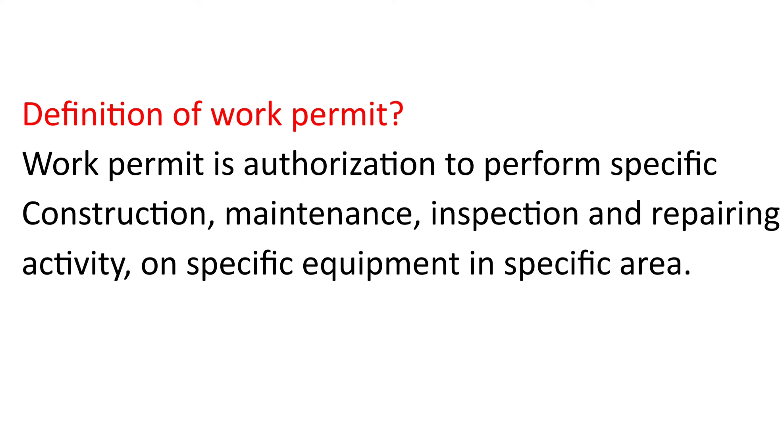Saudi Aramco safety supervisor question and answer. Question: definition of work permit. Answer: a work permit is authorization to perform specific construction, maintenance, inspection, and repairing activity on specific equipment in a specific area.

Question: define safety. Answer: freedom from risk or harm, loss, or injury. Question: what is a potential hazard? Answer: anything that can cause harm to people, the environment, assets, and business.

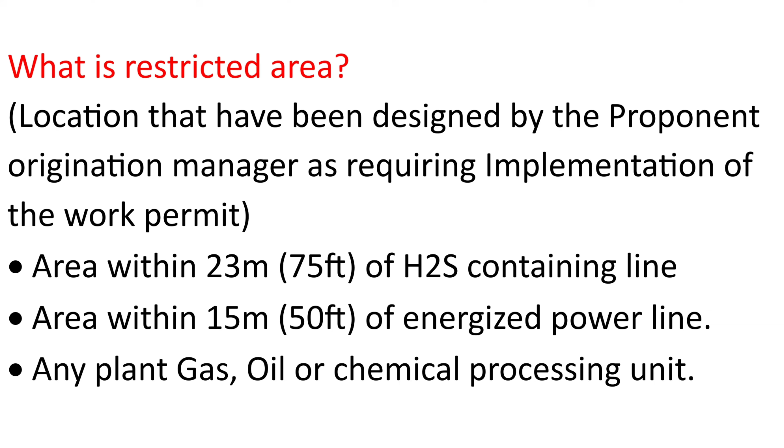Question: what is a restricted area? Answer: locations that have been designated by the proponent organization manager as requiring implementation of the work permit; areas within 23 meters (75 feet) of an H2S-containing line; areas within 15 meters (50 feet) of an energized power line; any plant gas, oil or chemical processing unit.

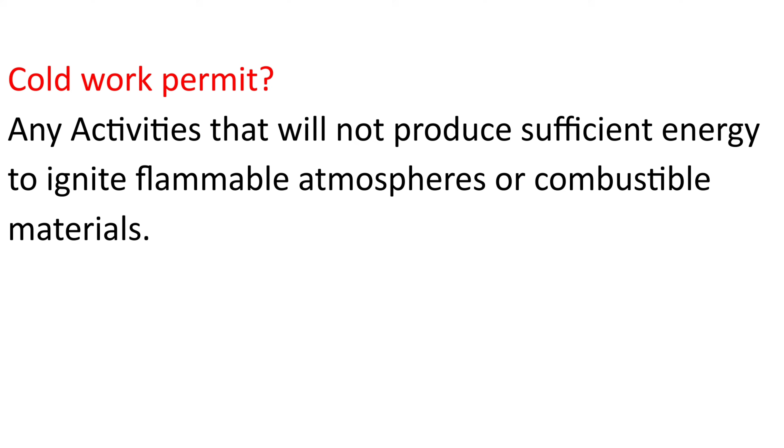Question: cold work permit. Answer: any activities that will not produce sufficient energy to ignite flammable atmospheres or combustible materials. Question: define hot work. Answer: any activity that may develop enough spark, flame, or heat to ignite a flammable atmosphere or combustible material.

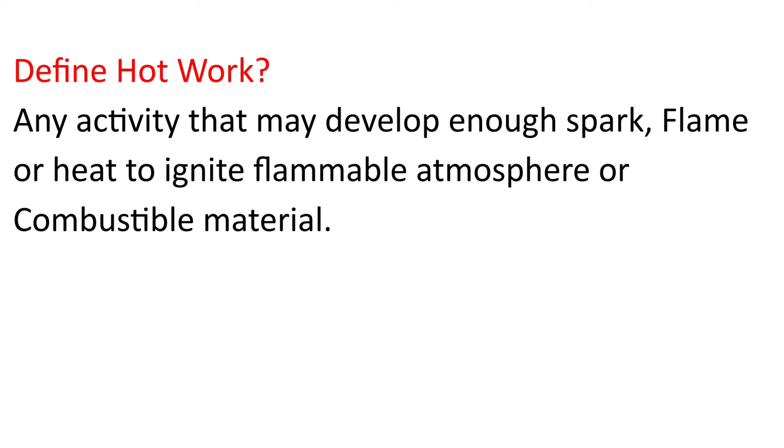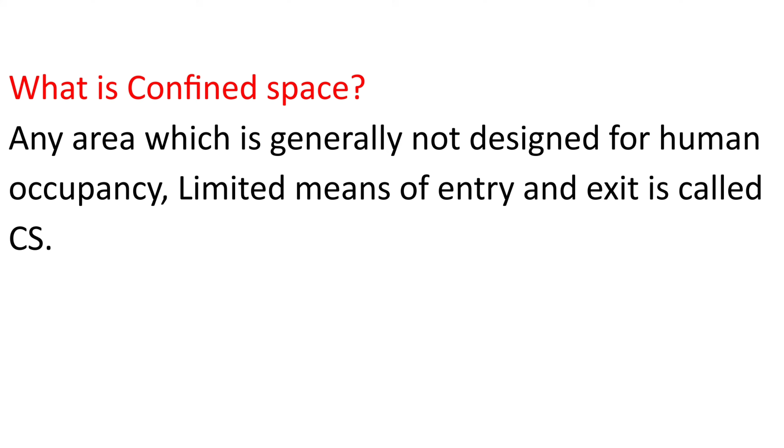Question: what is a confined space? Answer: any area which is generally not designed for human occupancy, with limited means of entry and exit, is called a confined space. Question: examples of confined space. Answer: vessels, valve boxes, manholes, boilers, tanks, and excavations more than 1.2 meters, etc.

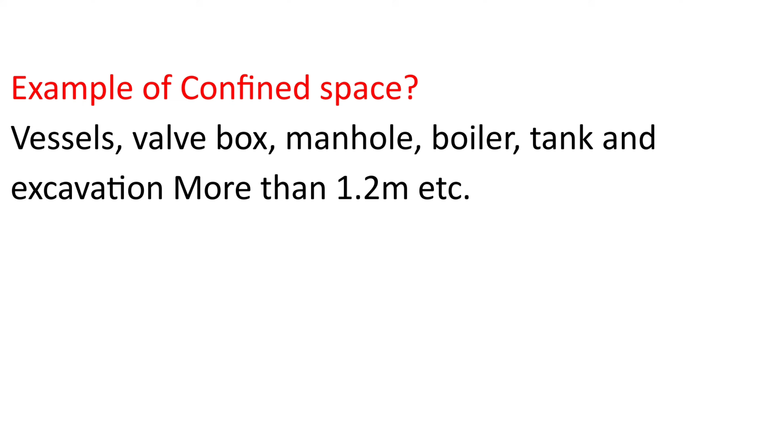Question: what is EO/LB? Equipment opening, line break. Answer: any activity associated with the initial opening of equipment that is part of a closed system that may contain hazardous material. This permit may be used for oil and gas pipelines, H2S pipelines, nitrogen pipelines, and hazardous material lines like sulfuric acid.

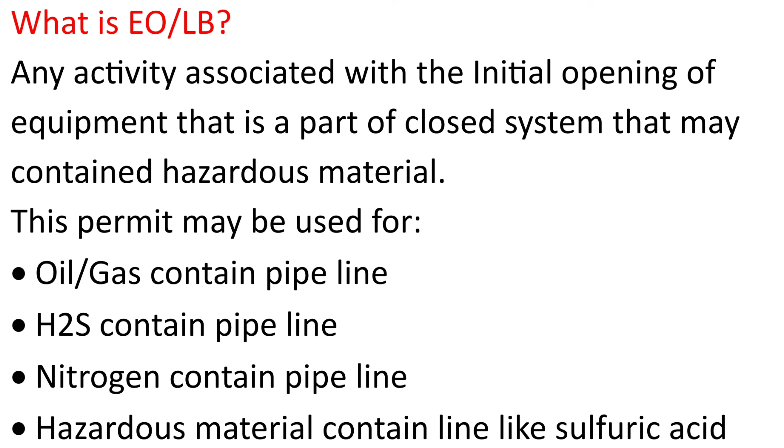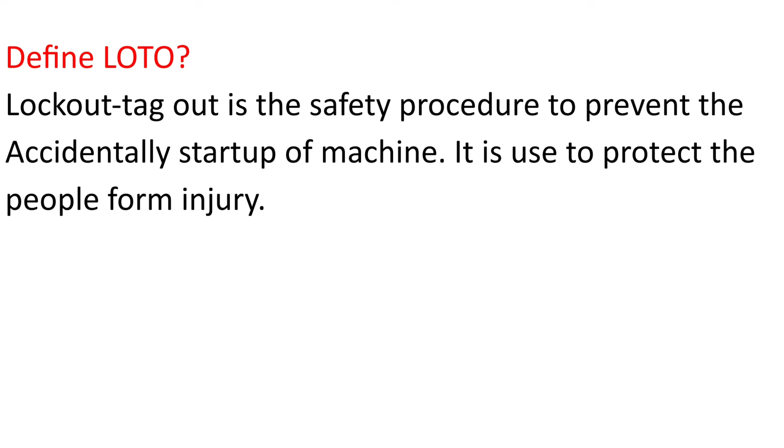Question: define LOTO. Answer: lockout and tagout is the safety procedure to prevent the accidental start-up of a machine. It is used to protect people from injury. Question: where is LOTO installed? Answer: on electrical equipment, LOTO is installed on the junction box and breaker or switch. On mechanical equipment, LOTO is installed on the valve.

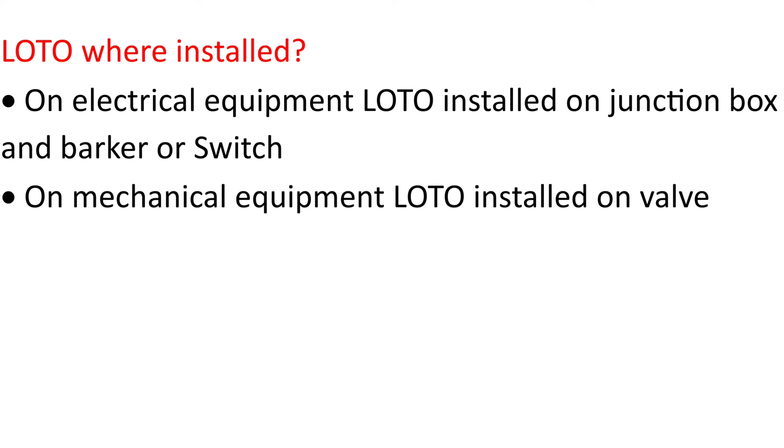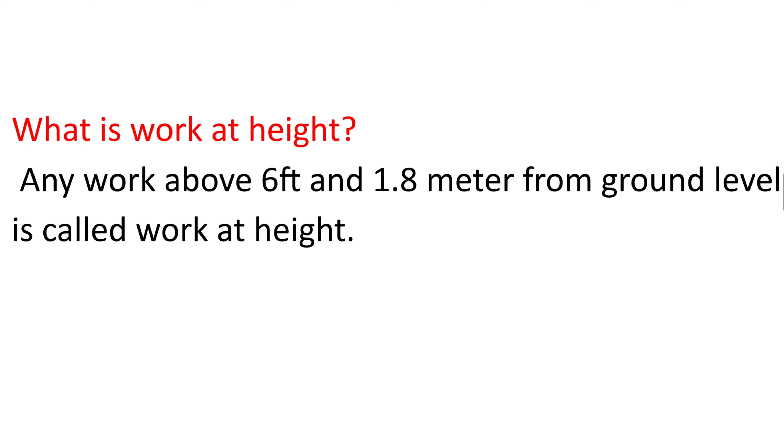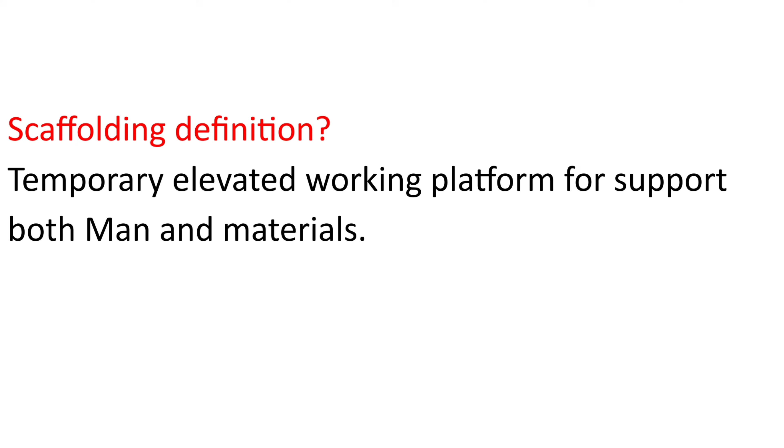Question: what is work at height? Answer: any work above 6 feet or 1.8 meters from ground level is called work at height. Question: scaffolding definition. Answer: a temporary elevated working platform to support both men and materials.

Question: scaffolding tag signature and validity. Answer: above 1.8 meters to 6 meters, the tag is signed by an Aramco approved scaffolding supervisor. Above 6 meters, the tag is signed by an Aramco approved inspector, and both are valid for 2 weeks or 14 days. Above 12 meters and heavy loads need a scaffolding plan prepared by a certified scaffolding engineer.

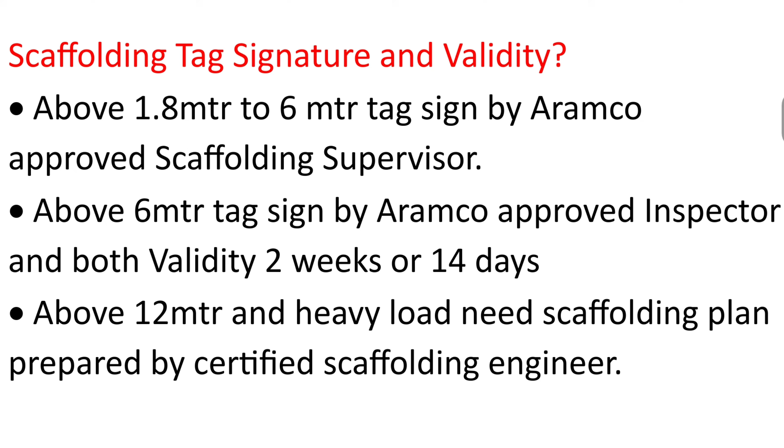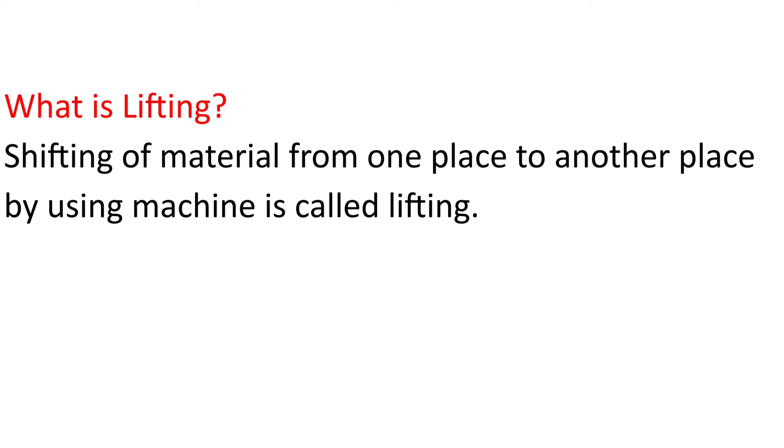Question: what is lifting? Answer: shifting material from one place to another by using a machine is called lifting. Question: types of cranes. Answer: mobile crane, hydraulic crane, overhead crane, gantry crane, tower crane.

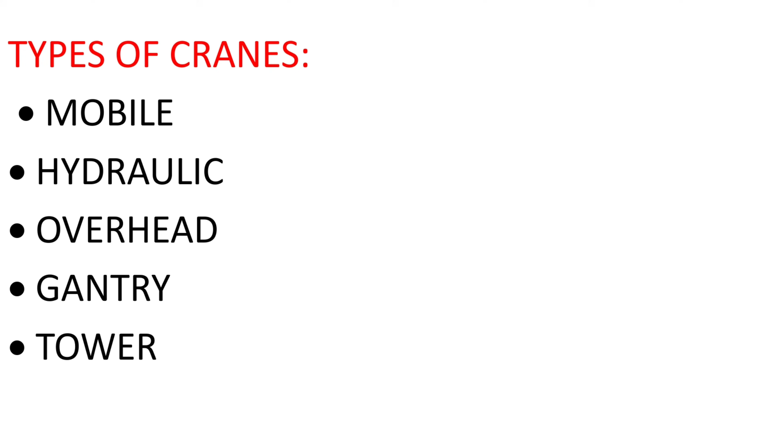Question: rigger level 1 capacity. Answer: lifting over 40 tons. Question: rigger level 2 capacity. Answer: lifting up to 40 tons. Question: rigger level 3 capacity. Answer: lifting up to 10 tons.

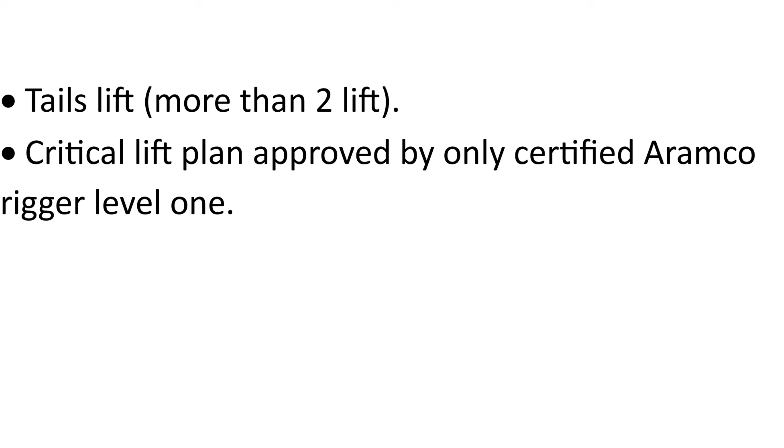Question: what is critical lifting? Answer: lifting over 40 tons, lifting near overhead power lines, lifting near populated areas, lifting near railway lines, lifting at night time, lifting in a plant, lifting more than 85% of rated crane capacity, tandem lifting with 2 or more cranes. The critical lift plan is approved only by a certified Aramco rigger level 1.

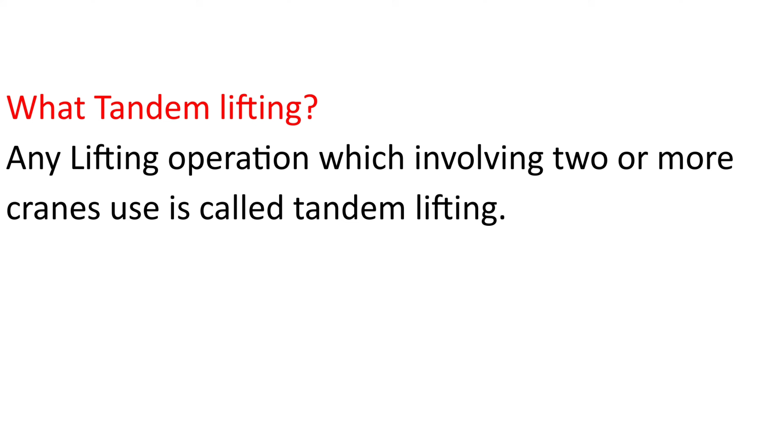Question: what is tandem lifting? Answer: any lifting operation which involves 2 or more cranes is called tandem lifting. Question: what do TWA and SWL stand for? Answer: TWA stands for time weighted average. SWL stands for safe working load.

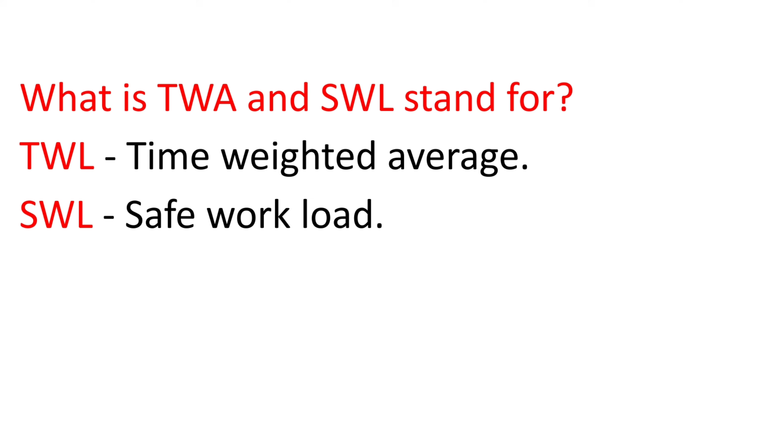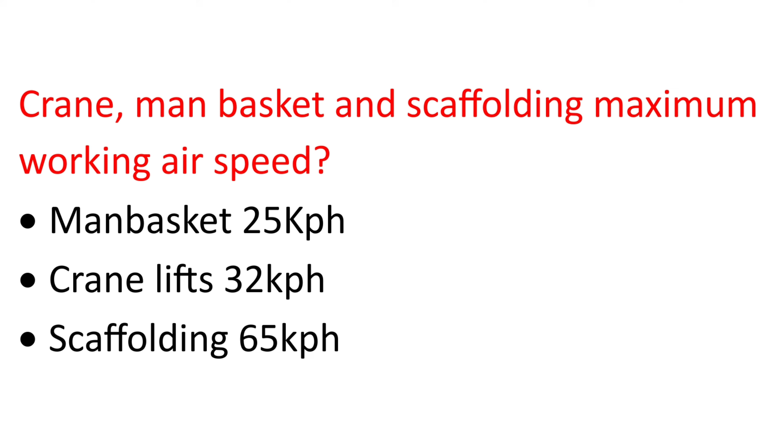Question: crane, man basket and scaffolding maximum working wind speed. Answer: man basket 25 km per hour, crane lifting 32 km per hour, scaffolding 65 km per hour.

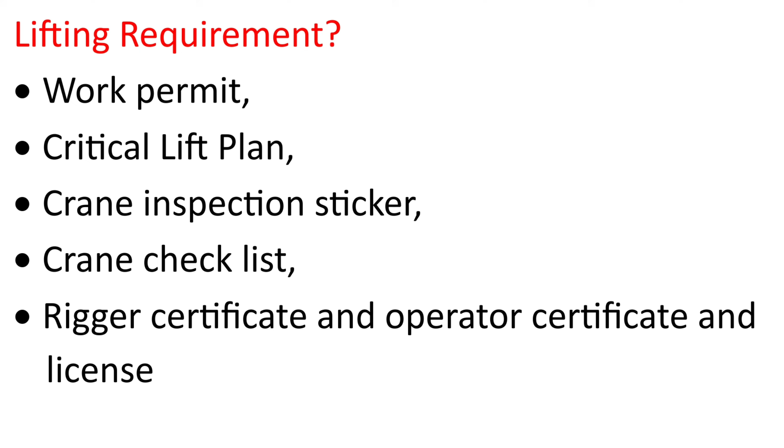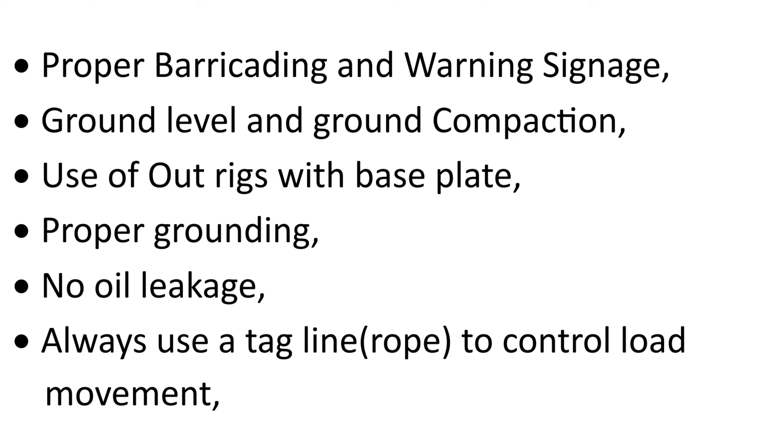Question: lifting requirements? Answer: work permit, critical lift plan, crane inspection sticker, crane checklist, rigger certificate, operator certificate and license, proper barricading and warning signage, ground level and ground compaction, use of outriggers with base plates, proper grounding, no oil leakage, always use a tag line rope to control load movement, safe distance from power lines, boom safe angle 45.

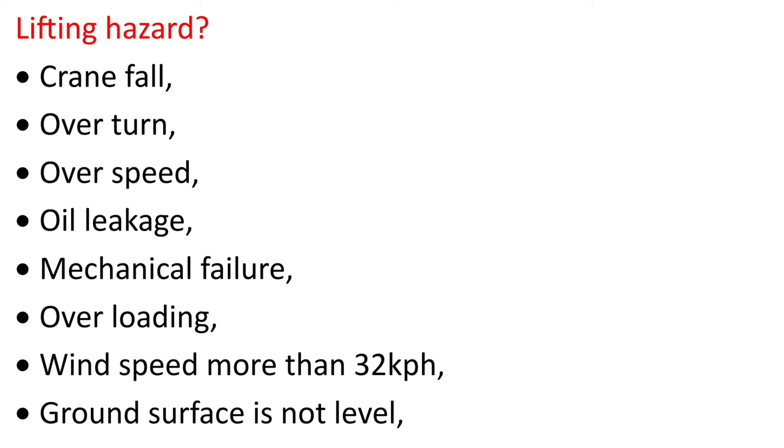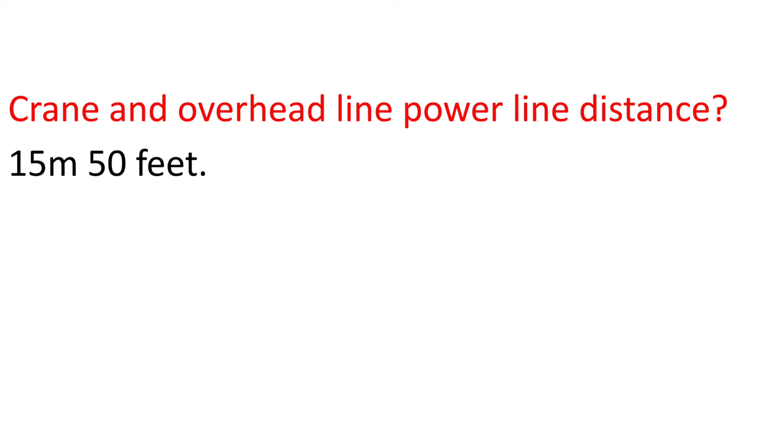Question: lifting hazards. Answer: crane fall, overturn, overspeed, oil leakage, mechanical failure, overloading, wind speed more than 32 km per hour, ground surface not level. Question: crane and overhead power line distance. Answer: 15 meters, 50 feet.

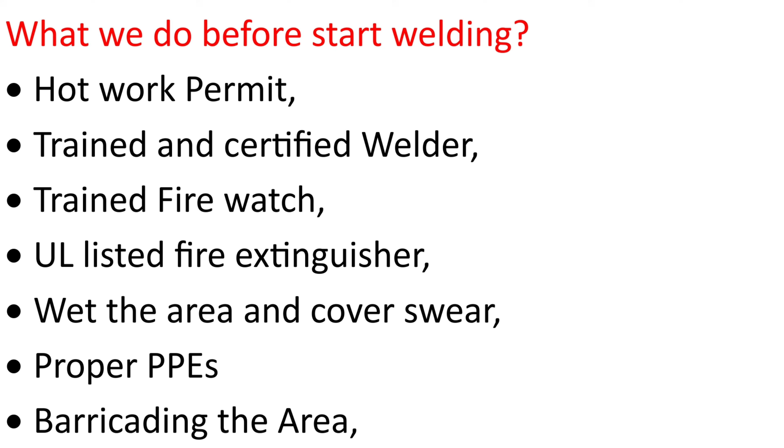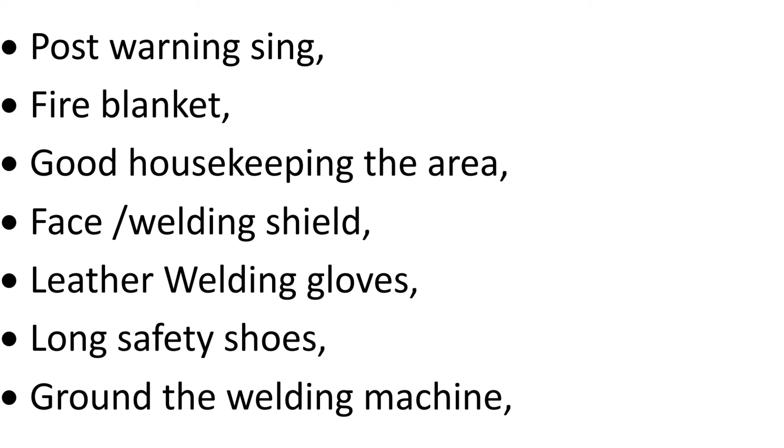Question: what do we do before starting welding? Answer: hot work permit, trained and certified welder, trained fire watch, UL listed fire extinguisher, wet the area and cover sewers, proper PPE, barricade the area, post warning signs, fire blanket, good housekeeping of the area, face welding shield, leather welding gloves, long safety shoes, ground the welding machine.

Question: what does PASS stand for? Answer: P for pull the pin, A for aim at the base of the fire, S for squeeze the lever, S for sweep from side to side.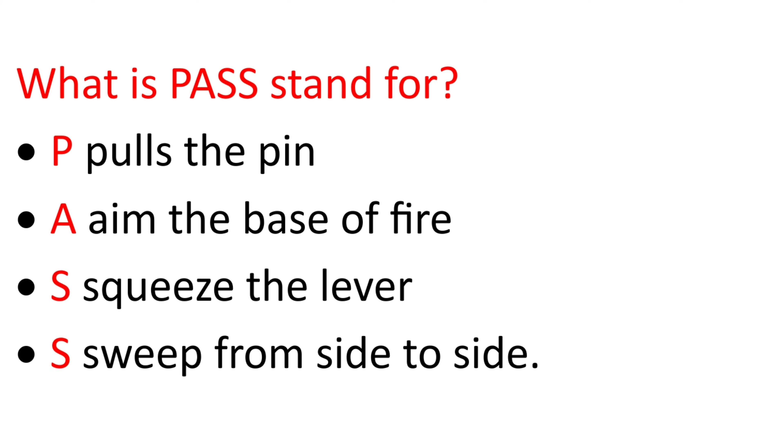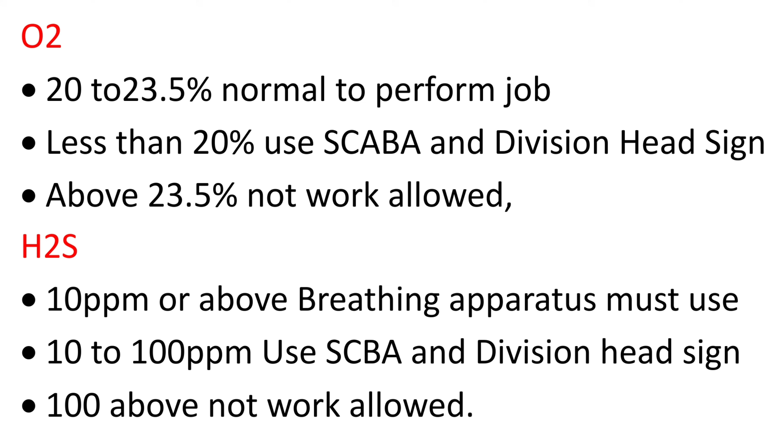Question: gas levels. Answer: oxygen, 20% to 23.5% is normal to perform the job. Less than 20%, use SCBA and division head sign. Above 23.5%, no work allowed. H2S: 10 ppm or above, breathing apparatus must be used; 10 to 100 ppm, use SCBA and division head sign; 100 and above, no work allowed.

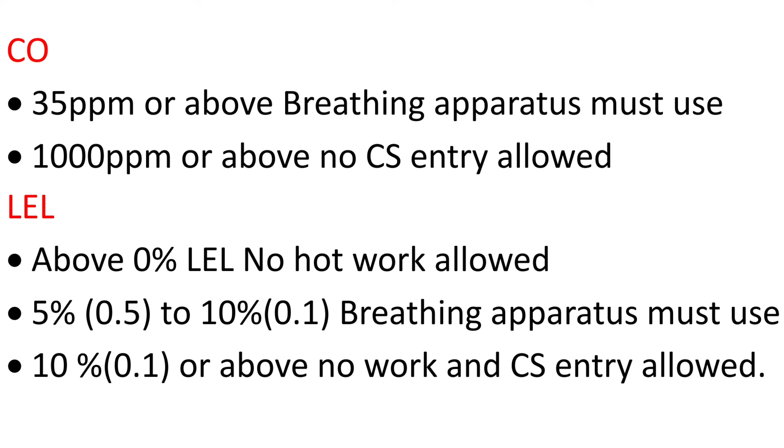CO: 35 ppm or above, breathing apparatus must be used; 1000 ppm or above, no confined space entry allowed. LEL: above 0% LEL, no hot work allowed. 5% (0.5) to 10% (0.1), breathing apparatus must be used. 10% (0.1) or above, no work and no confined space entry allowed.

Question: what is the IDLH limit of H2S? Answer: immediately dangerous to life and health, 100 ppm and above. Question: what is fire? Answer: the chemical chain reaction of fuel, heat, and oxygen is called fire.

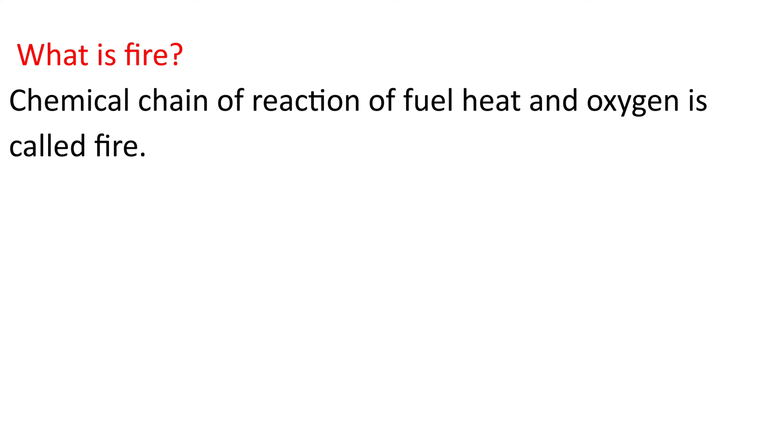Question: class of soil and angle used in excavation. Answer: rock, slope angle 90 degrees. Class A, tight cohesive soils such as clay, slope angle 75 degrees. Class B, less cohesive soils such as mixed soil, rock and clay, slope angle 45 degrees. Class C, least cohesive soils such as gravel, sand, freely slipping soil, safe slope angle 34 degrees.

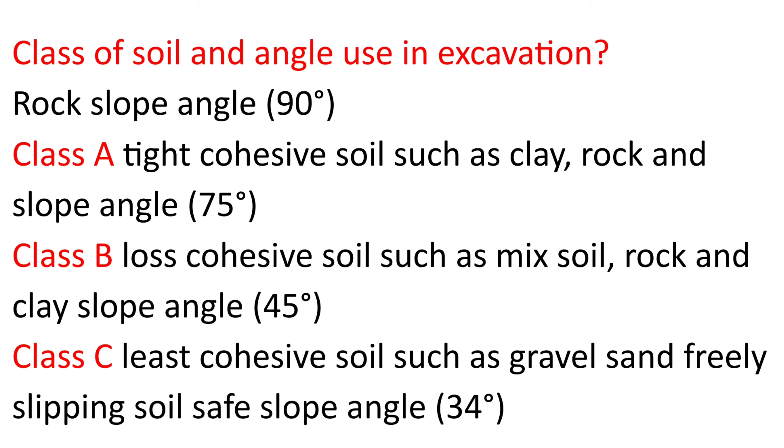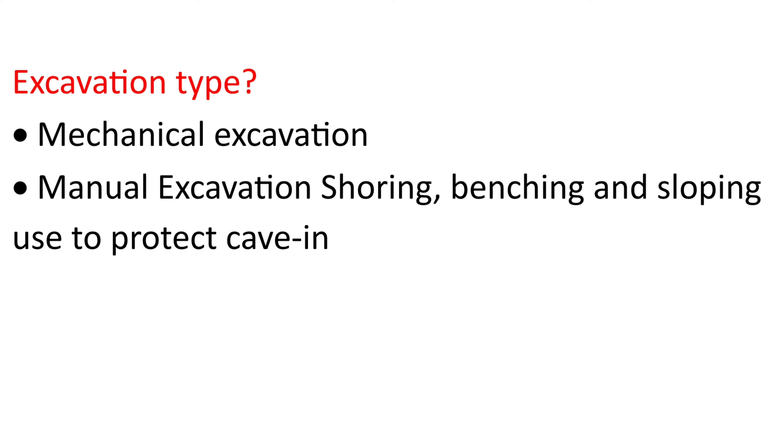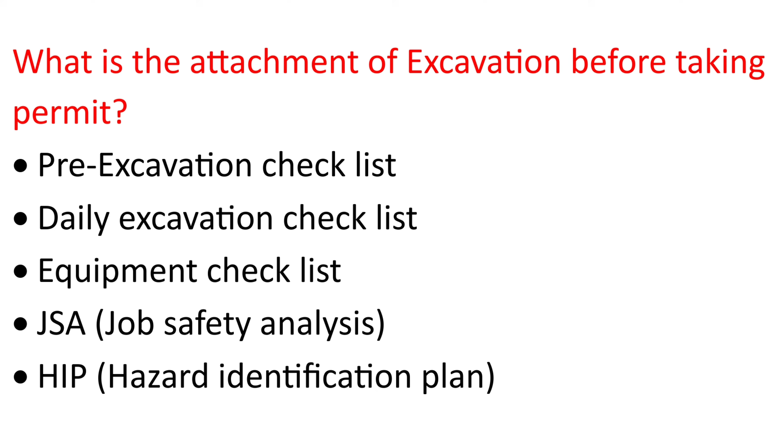Question: excavation type. Answer: mechanical excavation and manual excavation. Shoring, benching, and sloping are used to protect against cave-in. Question: what are the attachments of excavation before taking a permit? Answer: pre-excavation checklist, daily excavation checklist, equipment checklist, JSA (job safety analysis), HIP (hazard identification plan), MS (method statement), confined space entry plan, excavation plan.

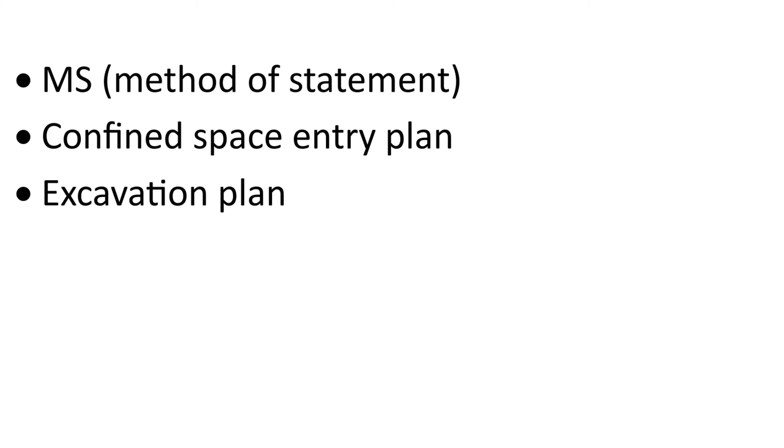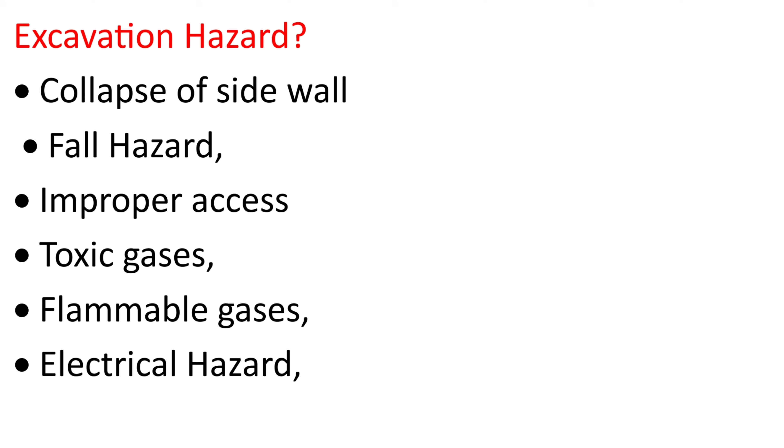Question: excavation hazards. Answer: collapse of sidewall, fall hazard, improper access, toxic gases, flammable gases, electrical hazard, fire hazard, slip, trip and fall, poor housekeeping, proper sloping and shoring method not used, biological hazards such as snakes, bacteria, scorpions.

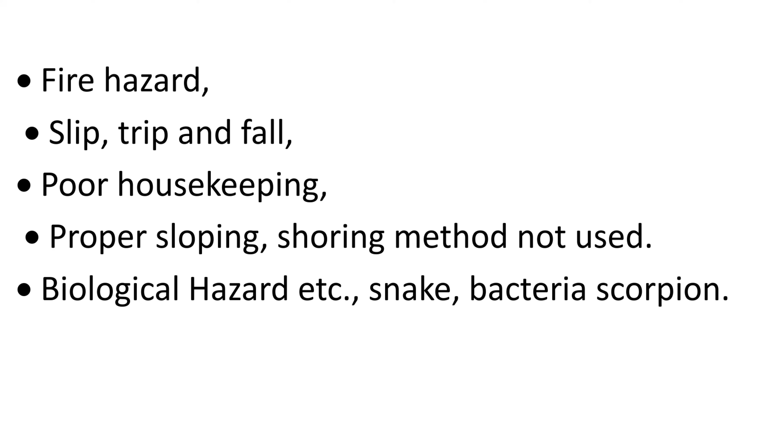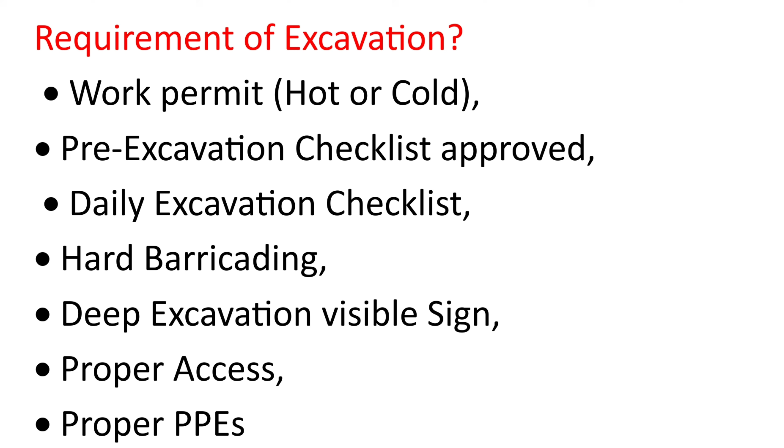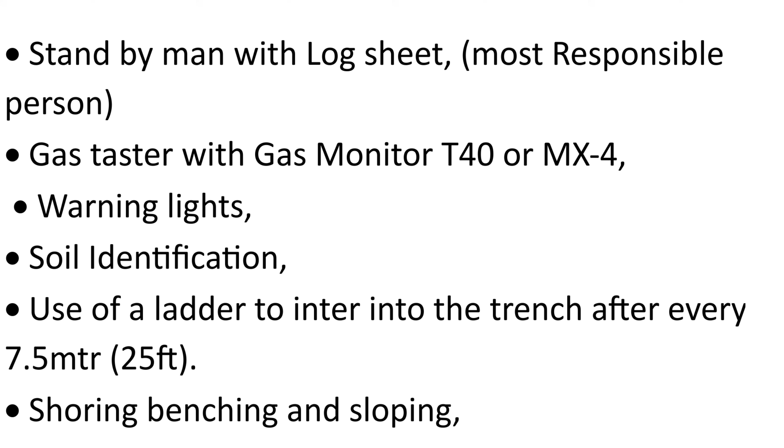Question: requirements of excavation. Answer: work permit, hot or cold, pre-excavation checklist approved, daily excavation checklist, hard barricading, deep excavation visible sign, proper access, proper PPEs, standby man with log sheet, most responsible person, gas tester with gas monitor, warning lights, soil identification, use of a ladder to enter the trench after every 7.5 meters (25 feet), shoring, benching and sloping, dewatering.

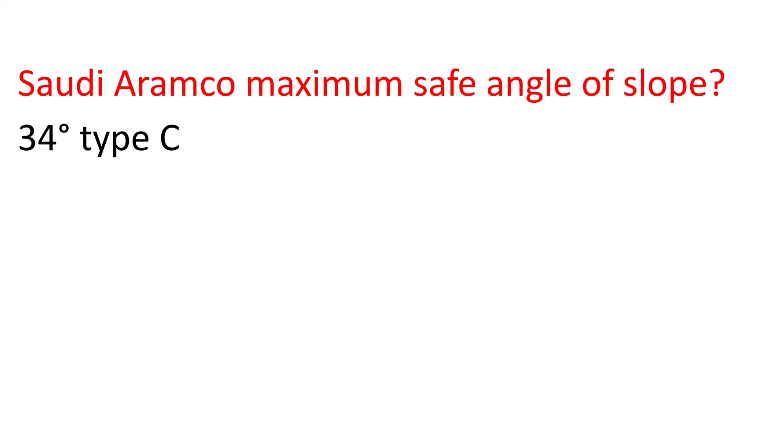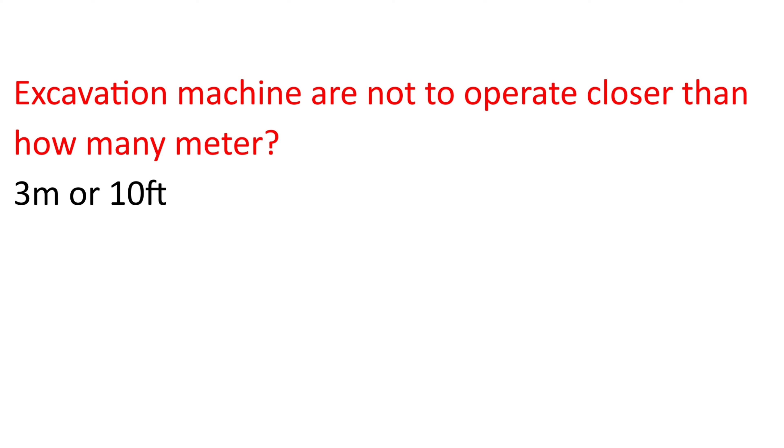Question: Saudi Aramco maximum safe angle of slope. Answer: 34 degrees, type C. Question: excavation machines are not to operate closer than how many meters? Answer: 3 meters, or 10 feet. Question: in benching, the horizontal step and vertical rise between each step should be approximately how many meters? Answer: 1.2 meters, 4 feet.

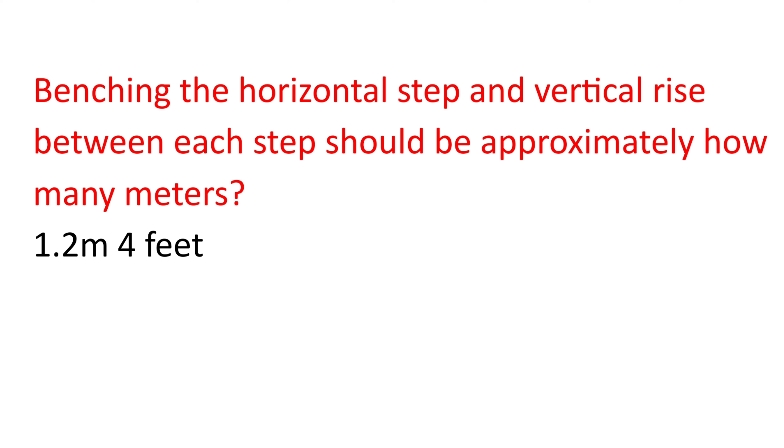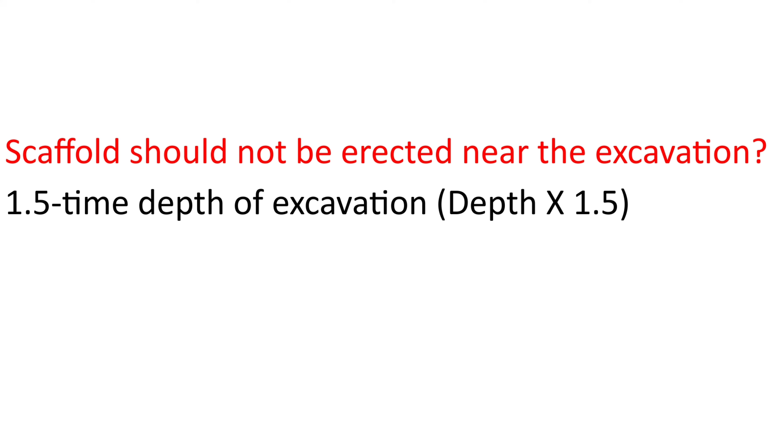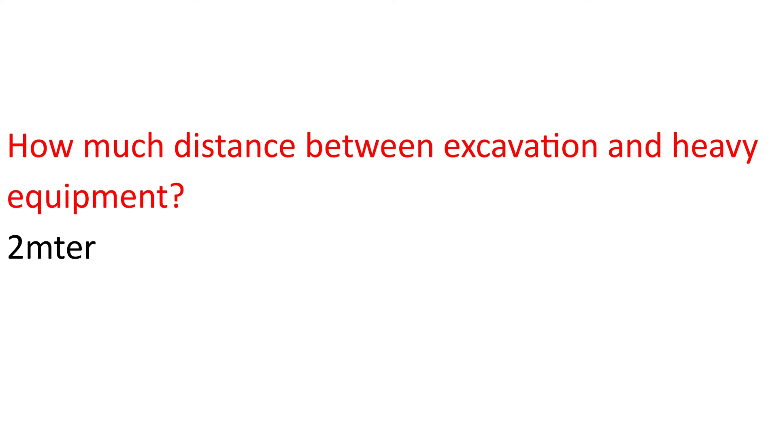Question: motor vehicles, cranes and heavy equipment shall be kept how far from the edge of excavation? Answer: 2 meters, 6.5 feet. Question: spoil piles should be placed at least how many feet from the edge of excavation? Answer: 2 feet away. Question: scaffold should not be erected near the excavation within what distance? Answer: 1.5 times the depth of excavation. Question: how much distance between excavation and heavy equipment? Answer: 2 meters.

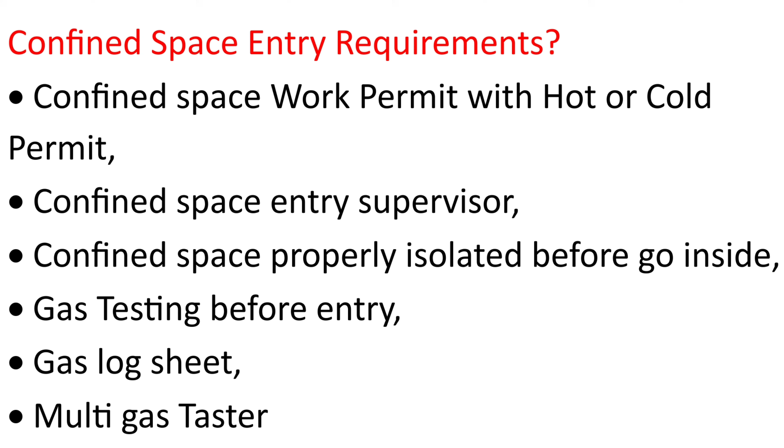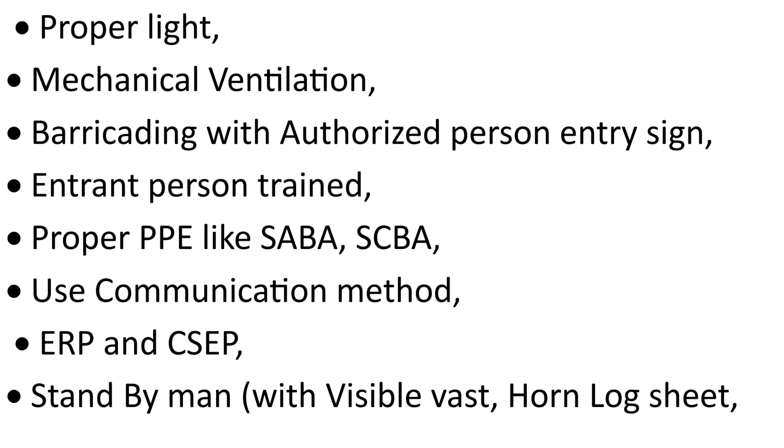Question: confined space entry requirements. Answer: confined space work permit with hot or cold permit, confined space entry supervisor, confined space properly isolated, gas testing before entry, gas log sheet, multi-gas tester, proper light, mechanical ventilation, barricading with authorized person entry sign, entrant trained, proper PPE like SABA and SCBA, communication method, ERP, and confined space standby man with visible vest, horn, log sheet, and gas meter.

Question: confined space communication methods. Answer: face-to-face, hand signal, verbal communication, radio communication, OATH method. In this method, use a rope and lifeline.

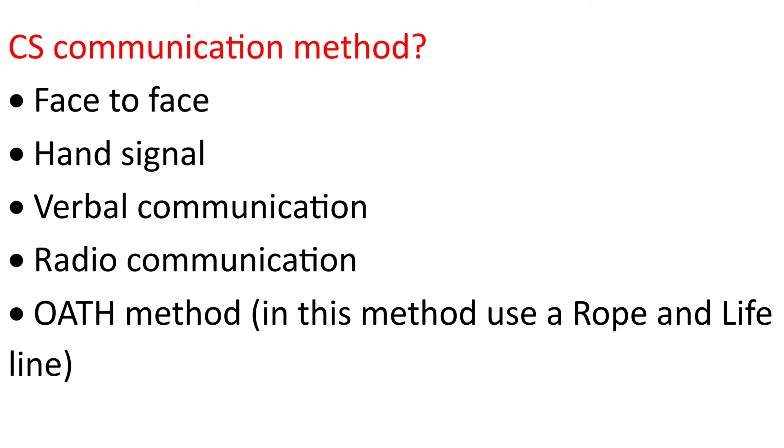Question: how to report an emergency. Answer: call 110 or 911 control room. Say three times, "This is an emergency call." Describe the incident location. Describe the incident. Report injury if any. Give your name and badge number. Repeat the above information. Last, stay on the line for further instruction.

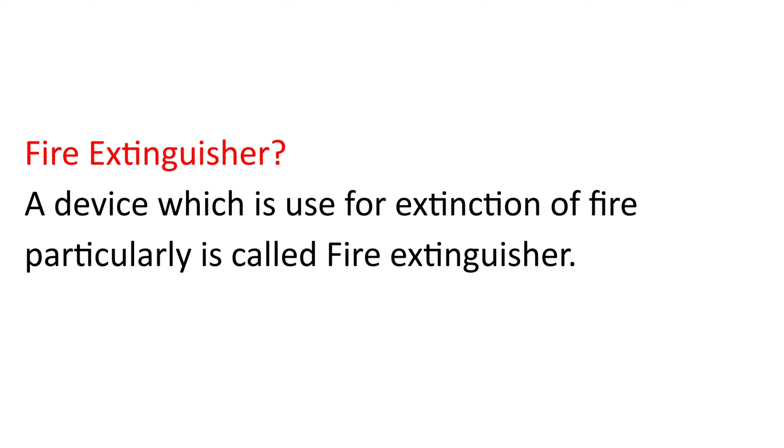Question: fire extinguisher. Answer: a device which is used for extinction of fire particularly is called a fire extinguisher. Question: define emergency. An accident that has the potential to cause serious injury and loss of life.

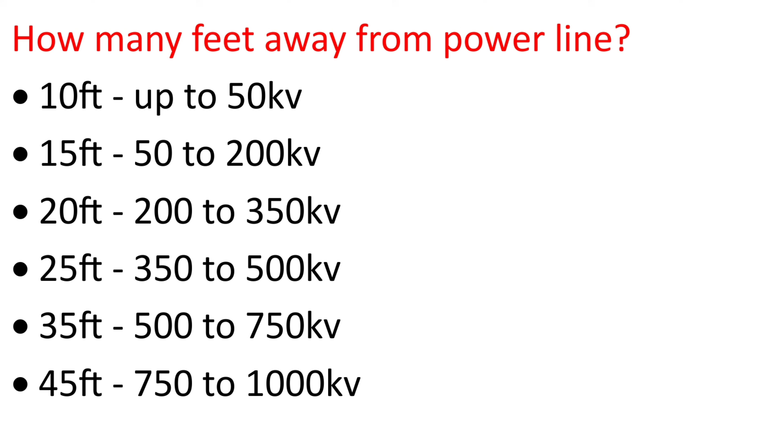Question: how many feet away from power lines? Answer: 10 feet away up to 50 kV, 15 feet from 50 kV to 200 kV, 20 feet from 200 kV to 350 kV, 25 feet from 350 kV to 500 kV, 35 feet from 500 kV to 750 kV, 45 feet from 750 kV to 1000 kV.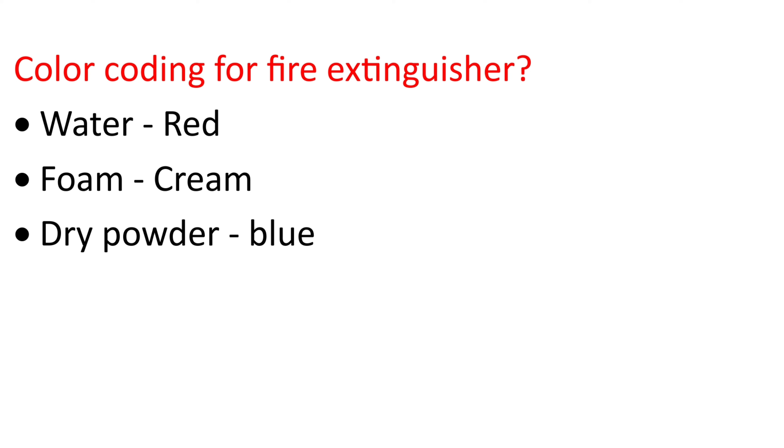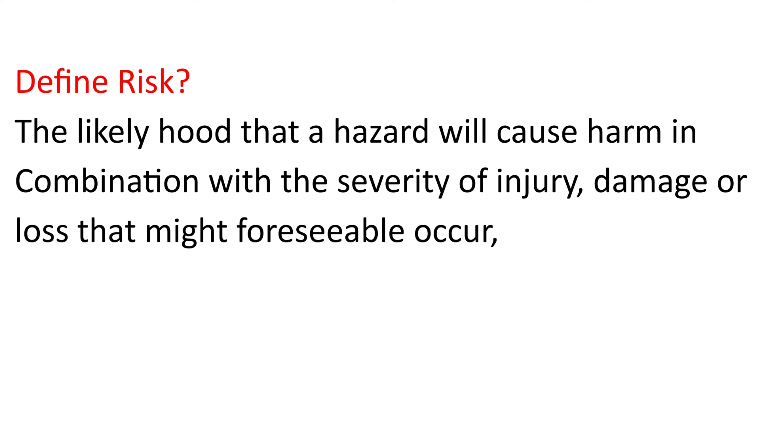Question: define risk. Answer: the likelihood that a hazard will cause harm in combination with the severity of injury, damage or loss that might foreseeably occur. Question: what is risk? Answer: a risk is the chance, high or low, that any hazard will actually cause somebody harm.

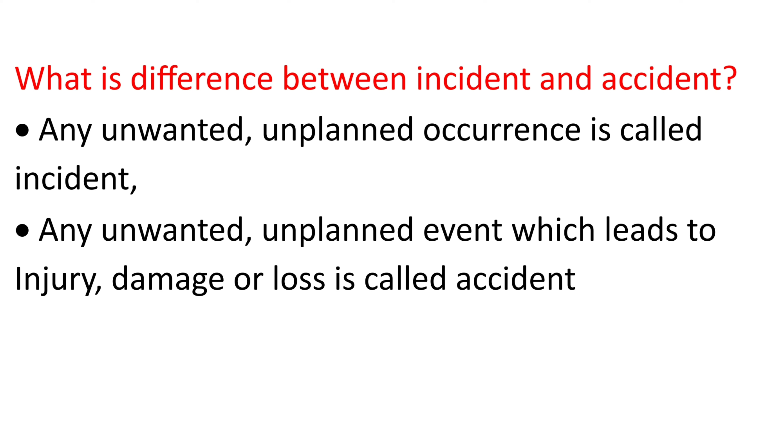Question: what is the difference between incident and accident? Answer: any unwanted, unplanned occurrence is called an incident. Any unwanted, unplanned event which leads to injury, damage or loss is called an accident. Question: define risk assessment. Answer: a formalized process of identifying the risks that they generate, and then either eliminating or controlling the risk.